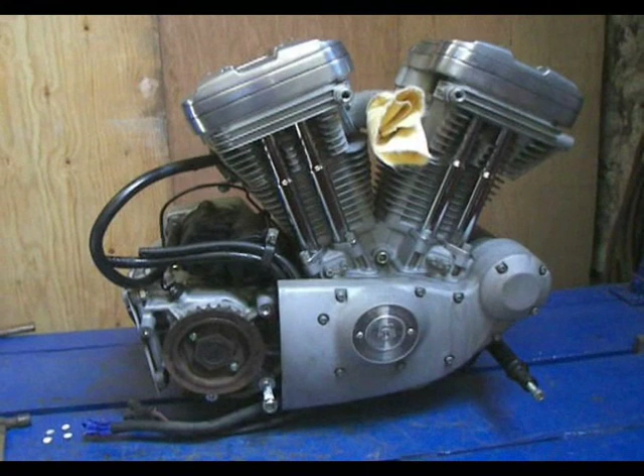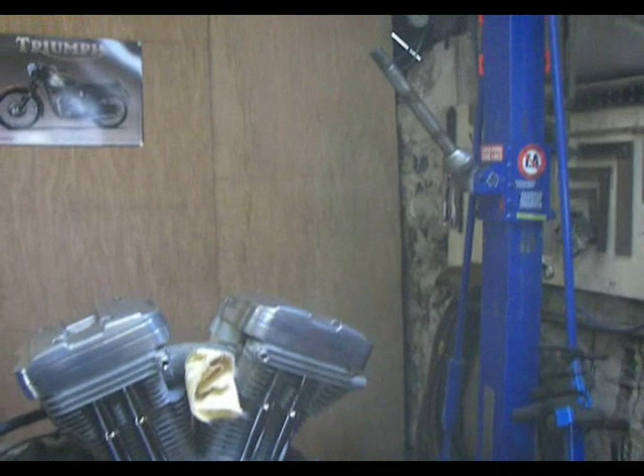Okay, today we're about to start building a Harley Davidson Sportster frame. I'll try and give this in a bit of detail since I know there'll probably be a lot more people interested in this one than a lot of the other ones I do. But you can see the engine just sitting in the jig, and we're still to line it up now. We're just making some brackets and various other things.

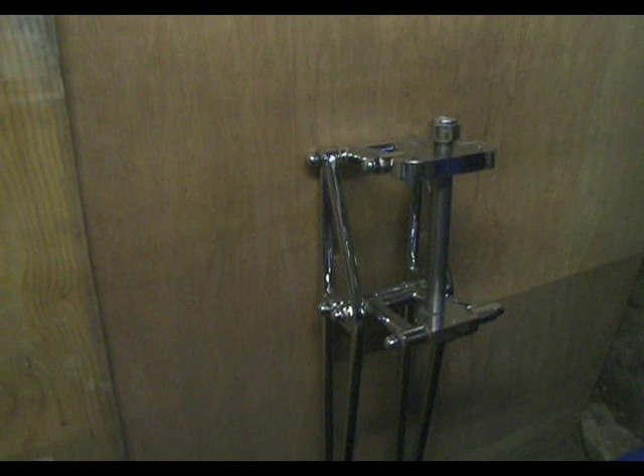Here's a picture of the next project. I'll put a still image in. It's going to have a set of girders on it. It's a Harley Sportster motor. There's the girder sitting down there. I've got to do some modifications to them. I'll take you through that as well, and I'm rigging it up for a disc brake, etc.

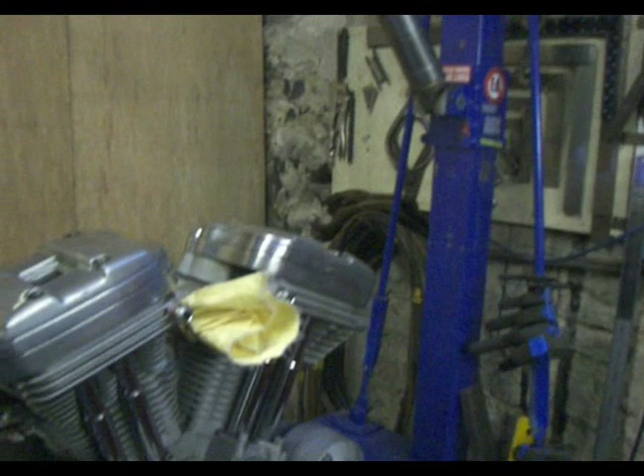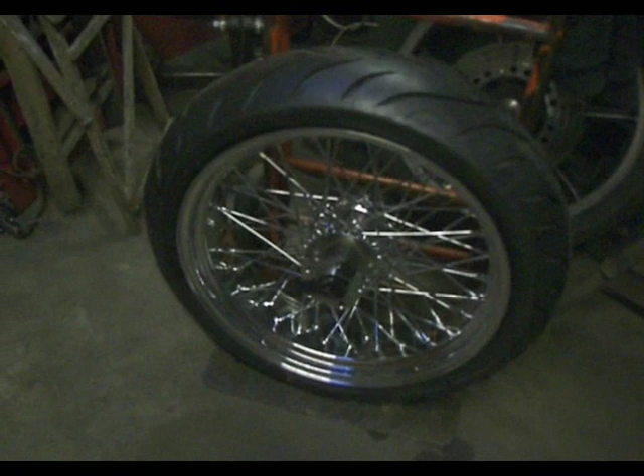And that's the Harley Sportster sitting in the jig just now. These are actually pictures of the wheels that are going on it, and I just took photographs of them and scanned them in. There's the back wheel there on it. But I'll take you through this process of building a frame around this engine.

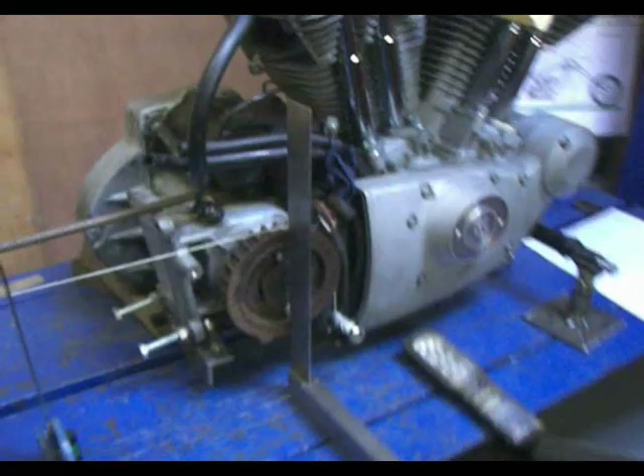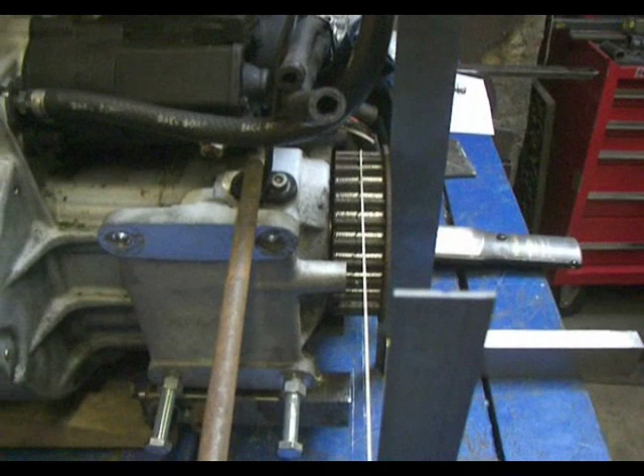Okay, back to the Harley motor. This has been a bit of a pain in the arse to line up. I'll try and show you here. Basically there's a 180 back wheel going on it. So I've measured the sprocket on that. He's going to change this belt drive to a sprocket. So I've put the chalk line down the centre of that where roughly the sprocket will sit.

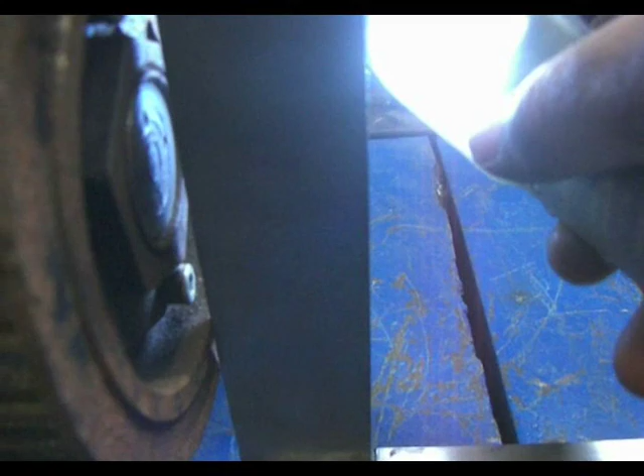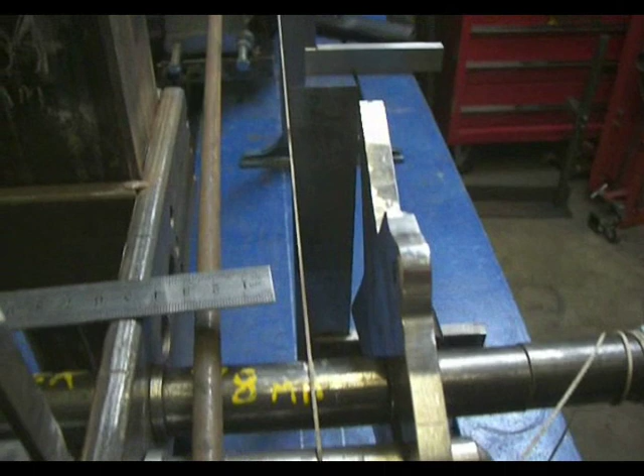Drawn some lines in the table, measuring off of the centre line here for the T-slot, and we're checking that the actual sprocket is sitting square, and I don't know if you can see that. You can see that it's not actually touching. There's no light getting through, sorry, just right on the tightest ring on that. I don't know if you'll see it actually lining up with the line that's on there. So that's it lined up.

I'm going to tack a bar onto the frame so that it can't move. And I've made up a couple of these stands to come off of the front forward controls. This is me working out the offset in the wheel. Again, that's what the bike's going to look like.

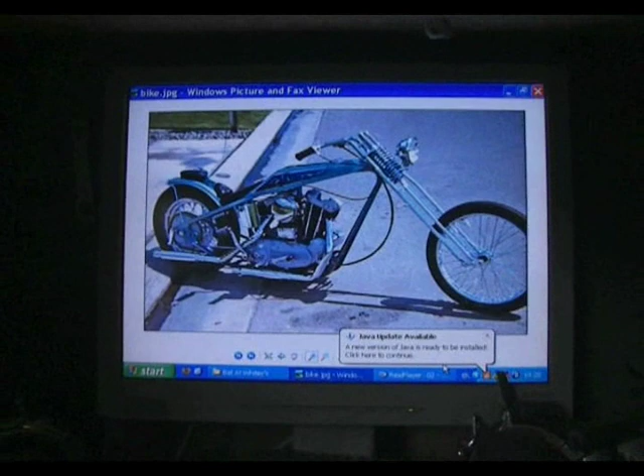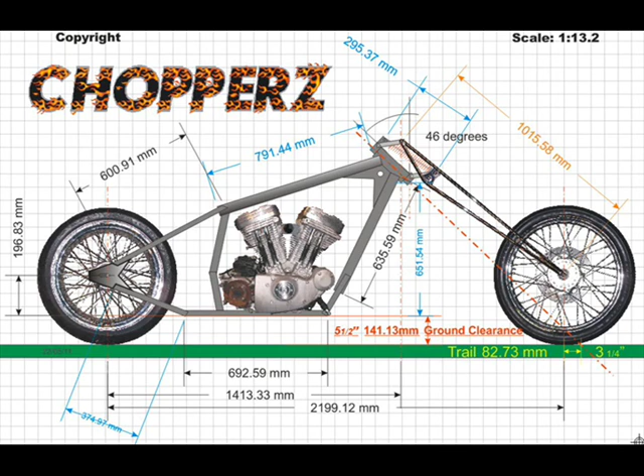And here's actually a picture of the bike he sent me that he was wanting it to look like, so the frame's going to look quite similar to that. Here I've brought the picture supplied by the customer into the program I use, scaled up a basic frame structure around that, and then from there produced this drawing that you see here, which is the actual frame that I will be building.

Okay, here we are with the Harley Sportster frame I'm building. I've done the lower tube rails and I've attached them to the front engine mounting with a solid bar drilled out and tapped, and as you can see at this end there's a 20mm spacer. This is so that it can apply a greater offset to the engine if need be in the future.

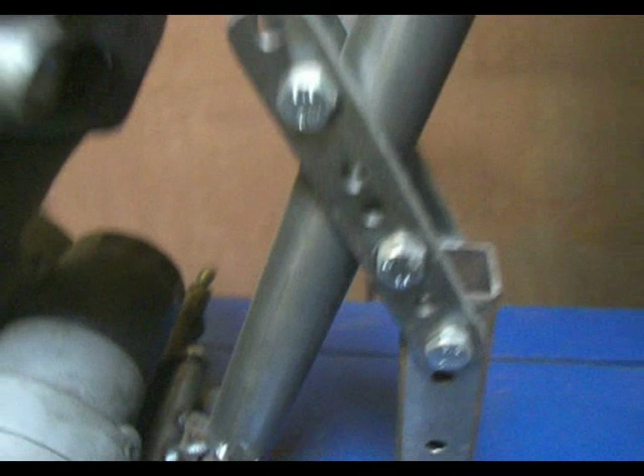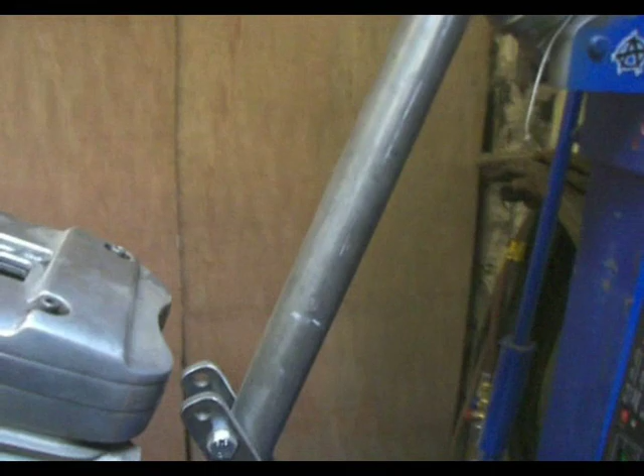It's a single down tube frame, and I've built up this wee jig just to support the front down tube and help align it, because it's blocked out partially by the engine when I'm looking up the centre line. Let's see if I can line that up for you. Hopefully you can pick that out.

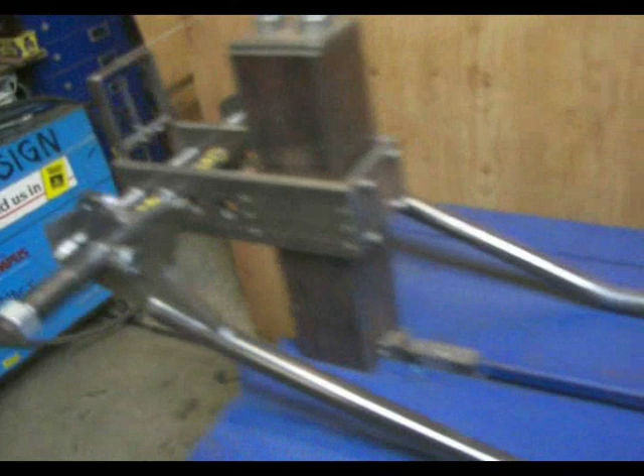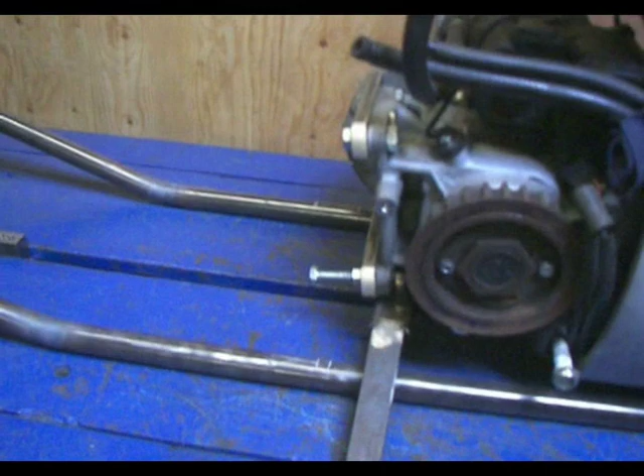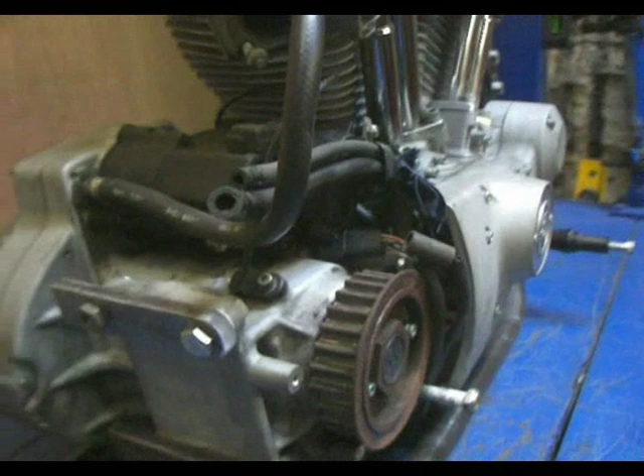I'm going to now do the tank tube and the rear engine tube. I think some people call it the backbone. The problem I had originally mounting up the engine in the Harley, I don't know if we can see under here, was that the Harley engine was actually sitting right in the middle of my slot, so I just had to put a wee bit of plate across that so that it wouldn't dig in there, which allowed me to line up this sprocket, making sure that it was square and ran parallel down the jig centre.

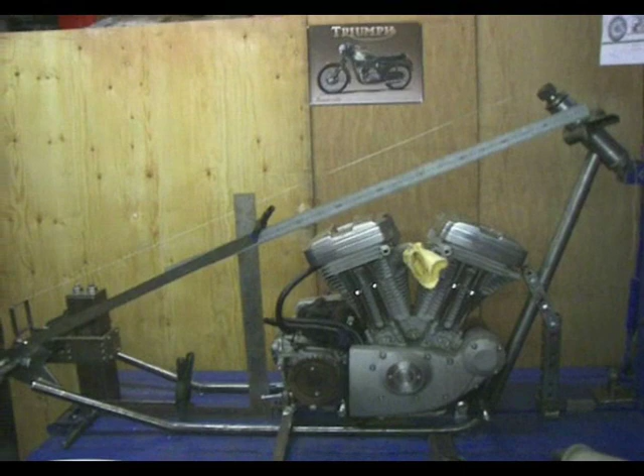Okay, I'll go on with the next bit and I'll get back and show you the next steps. Okay, a shot of the mock-up here with the rulers and that in place, just to let you see the sort of lines it's going to be. The tank tube, it's been cut to size and mitered already. I'm just using another wee section here to keep it sitting sort of square.

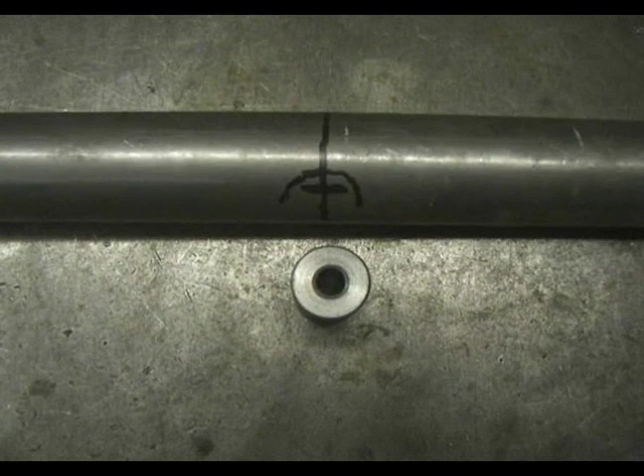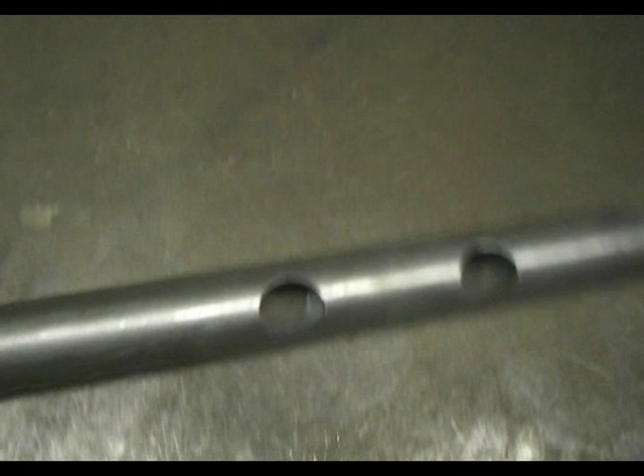We're going to have to notch the tube so that we can fit in this rear tank mount. It's going to have the standard Sportster tank that came off of the original bike, and this is the backbone for it. It's already been cut to size and it's had 2 holes drilled right through it. Now I just put it in the mill and drilled the holes.

You could probably use a hole saw for that, and I've turned out a couple of spacers that just fit through the holes, giving it a wee bit of room for play, as you can see there. And these will be lined up with the engine and the rear engine mounting bracket. I'll show you that when it's actually on the frame, and I'll show you this notch when I've taken that out as well.

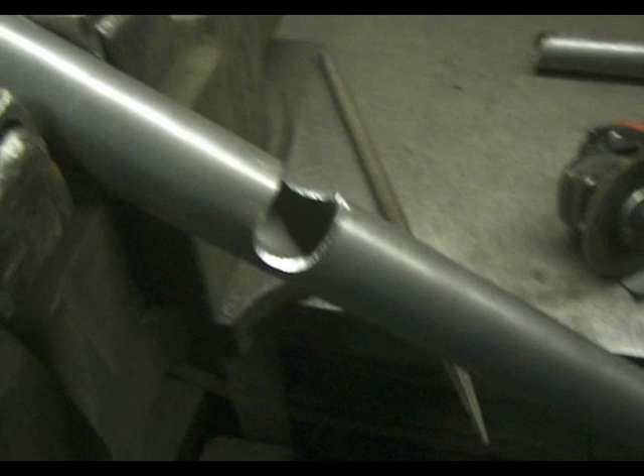Okay, here you'll see that we've taken this notch out of the tank tube. This is underneath it, and it fits a wee spacer. Now there's a wee bit of play in that. That's just so that I can line it up perfectly. It's no point in being too tight, and one of the ways I can see that it's sitting fairly square is if you look straight down the tube, and I've marked a couple of bits with ink marker to let me see where the pipe's sitting perfectly straight.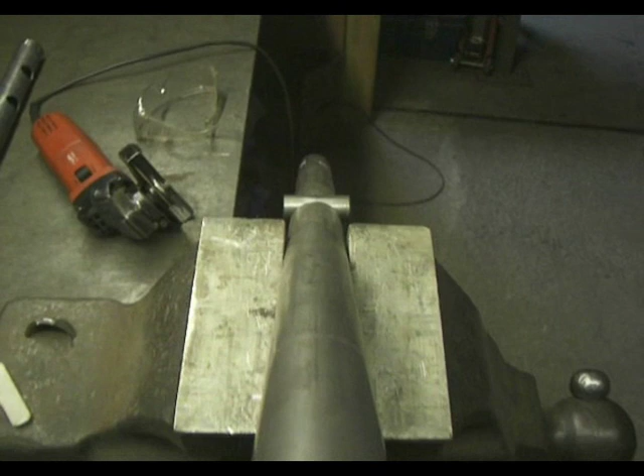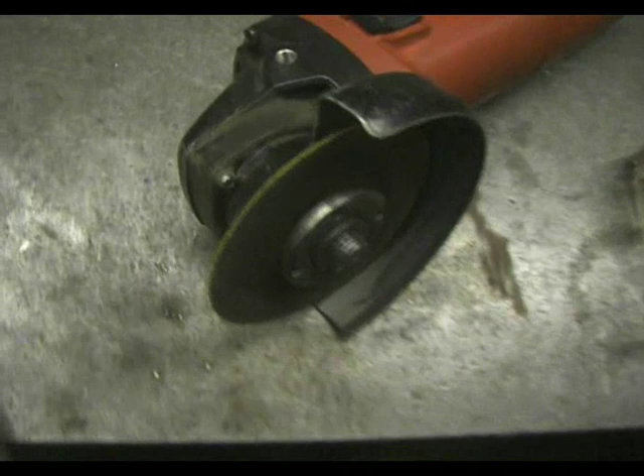And you can see there, so it's sitting fairly square, but I'll double check that when I put it onto the bench. Basically to get that, I just used the grinder with a wee thin 1mm disc on it and cut out this wee section. You can see it's just been cut to a point. Then I used one of these bastard files. They are called bastard because they're a bit rough, and I filed out the radiuses on there. But there we have it.

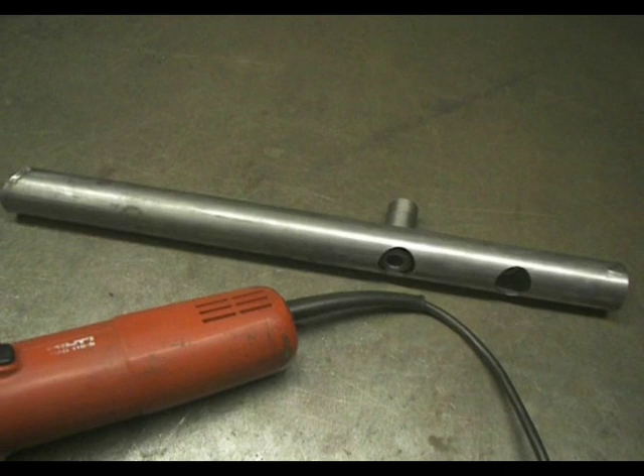So we'll tack that in place and get the backbone on as well, the rear engine mounting tube, and we'll show you that on the jig. The tank tube's placed into an upturned angle to form a V and heavily clamped in there before welding to minimise distortion. Okay, as you see, that's the tank tube on, and the backbone or rear engine mounting tube.

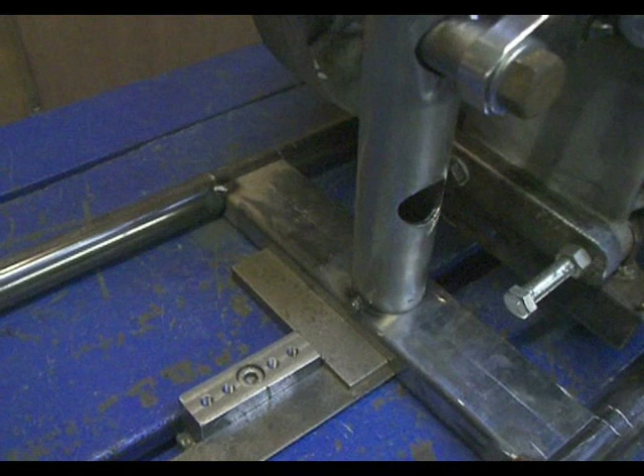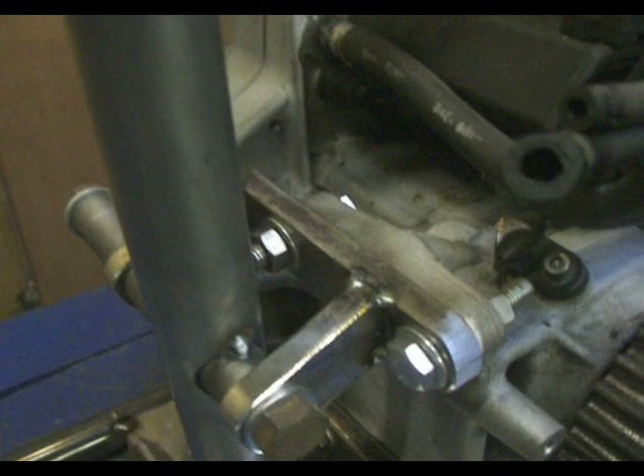I've joined the 2 down tubes with a 2" by 1" box section, 50 by 25. The engine mounting bracket is 30 by 12 flat bar, or about 1¼ by ½ inch. It's not the way they're normally done, but then I don't tend to copy the way other people do it and like to do my own thing.

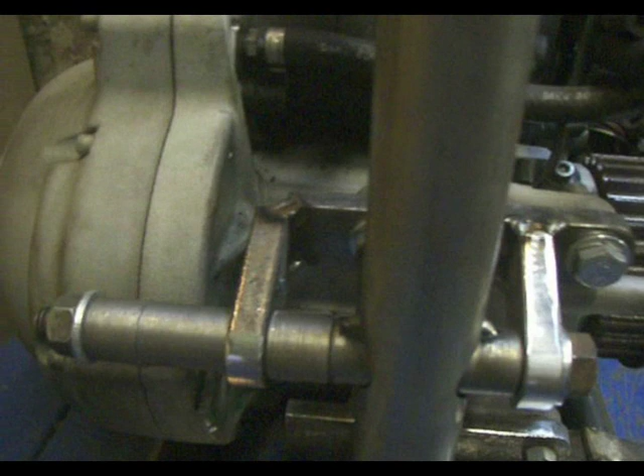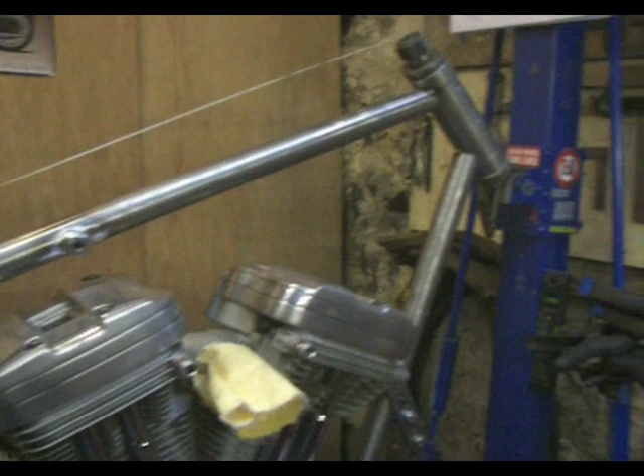You see, it's just holes drilled right through the tube and spacers made up that are welded in place, or tacked in place at this point in time. I have a 20mm spacer, 3/4 inch, at this side and also at the front, just to allow the engine to move over a wee touch without having to put a spaced out sprocket on it. And just again the one sort of tack weld on there. Let's see if we can show you it lined up.